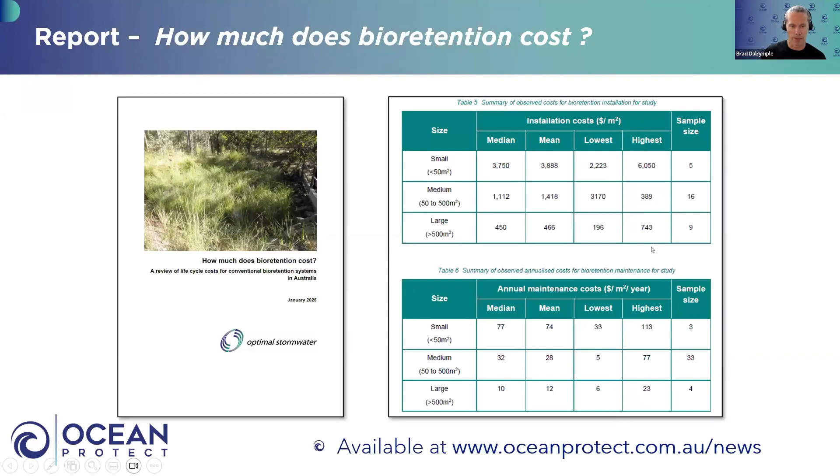Speaking of talking, who doesn't love a good podcast? And Sean has even made a guest appearance. Ratings went through the roof, I'm sure it wasn't just him listening to himself. But we've got a couple of crackers in recent times. Our very own Justine Barrett from CSIRO talking about one of the chapters of her PhD, basically talking about GPTs. And if you love stormwater, gee whiz, you're going to love that one. We had obviously Cal Glanznig before Justine a few weeks prior, a 25-year-old Sutherland Shire Council councillor and filmmaker. So absolute cracker of a podcast, and we'll be releasing a podcast for this year in probably a couple of months' time.

But here we go, okay now I can. Okay, if you want to press start, hit share again, that should be okay now. Actually, I can now see your slides. Maybe I was blocking you somehow. That look all right now? Looks good to me. If there's any dramas in the chat, just let us know. Thanks, Brad, thank you, Sean. The $100 check for that intro is on the way too. Welcome everyone.

We'll get stuck into it. So welcome to 2026. I'm pretty pumped for the year, I think it's going to be a pretty exciting year, hopefully full of growth and professional development and learning something new. So today, hopefully I'll help you on that journey.

So we're going to look at road flow design from a stormwater perspective. This is something everyone basically has to do if they're doing any sort of pit and pipe design or any sort of road design - even just geometric road design, they should be able to do this as well. So if this does sound new, or something your team hasn't really focused on, hopefully you'll be able to go back to the team and spread the knowledge and get people talking about this and discussing it.

So we're going to talk about road flow design. I'll run through a little bit of theory, a little bit of practical knowledge, and then at the end I've got a worked example where we use a very common equation to work out how much stormwater will actually be able to flow down a road. Super useful equation. Once you've got that, take this today and tomorrow you could probably create your own spreadsheets and automate those processes and make your design life hopefully a little bit easier. So we'll get stuck into it.

First, we're just going to touch on road flow and urban drainage systems - basically what we're talking about. We'll put it in some real tangible ways so we understand what we're looking at and can visualize it.

So when we're looking at road flow, today's talk is focused on urban drainage systems because we've got curb and channel and a road type formation. So that's what we're going to focus on. But the reason why road flow - or how much water can actually run down a road - is so important is because the roads actually act as part of the stormwater drainage system.

Now, I look at roads and that's the first thing that I see, because I'm a bit of a stormwater nerd myself - I'll just see a big open channel. I don't actually see a road for traffic and cars and everything else, that's sort of secondary to me. The first thing I think about is flooding and how much water it can actually convey, and where along those roads there's a problem where the water just sits, where it's in a sag. So hopefully after this, you might look at roads a little bit differently as well.

The Australian Rainfall and Runoff, our national guideline for stormwater, recognises that roads basically act as overland flow paths. That's a bit of a mindset shift you've got to take when you get into stormwater engineering and design. These road flows are an intentional component of the major stormwater drainage system, not just pits and pipes and headwalls going out into a creek. The actual road itself forms a very big part of that.

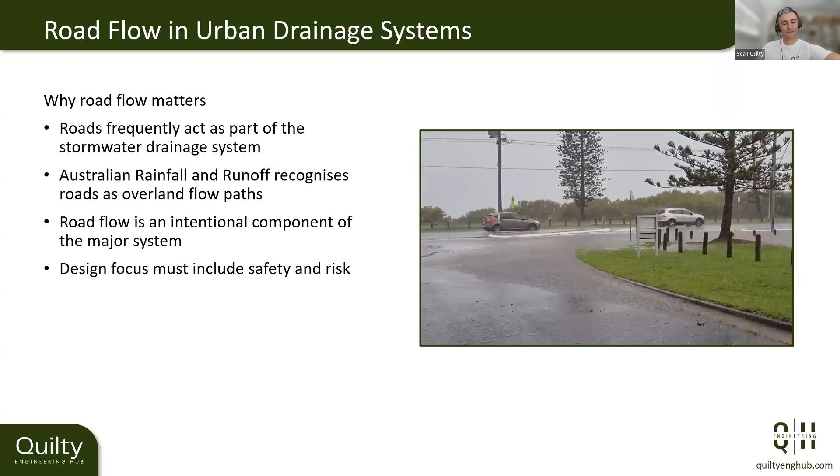When we're looking at road design, it's important to remember that exceedance is expected. When I say exceedance, that means the flows going through our road exceed the minor system capacity - we'll talk about major and minor systems shortly. Just remember, our roads and more importantly our pits and pipes are designed to exceed. They're designed to be overwhelmed or overcapacity, and to surcharge and spill out. That's how a good civil designer or civil engineer will actually design their systems.

AR&R states that exceedance is expected and unavoidable. When it comes to stormwater frequency - how often you get these storms, how rare or intense they might be - we're never able to construct or engineer a pipe or road to convey the stormwater all of the time. There's always going to be some events that exceed our design expectations, and that's how we try to build that into our design as well.

So if exceedance is expected and we can't avoid it, we know the roads are going to flood, our design focus then shifts from prevention to consequence management. This is something I've believed for many years now. When it comes to stormwater, maybe 30, 40 years ago it was all about looking up design tables and charts, and you could pinpoint exactly what the storm's going to do. Whereas we know it's much more unpredictable, especially when we start looking at the climate change impacts we're already feeling and going into the future.

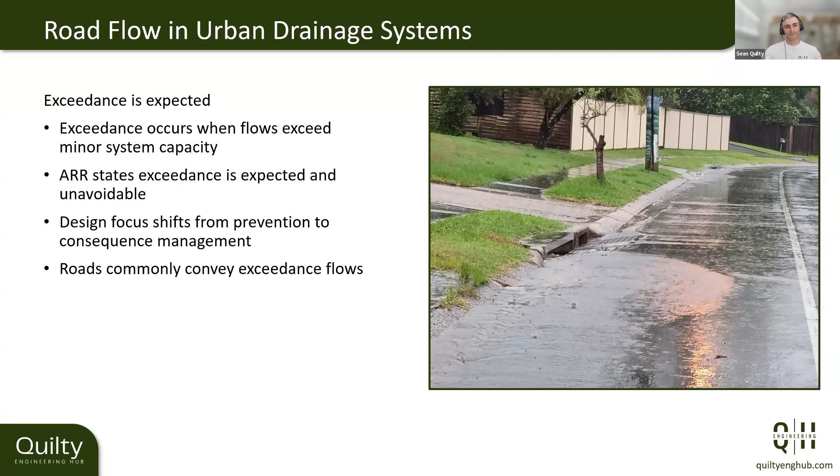So when we start looking at roads, I think everyone will look at roads a little bit differently now. Any new road that's now designed in the last 50 years or so is designed to be an overland flow path, particularly in urban environments. It's just a great big, wide, very shallow channel, essentially.

AR&R identifies this. They know that overland flow paths are critical infrastructure now when it comes to stormwater. So it's not just the pits and pipes. In fact, I'd go as far to say the pit and pipe drainage is just a very small part of the design, and you shouldn't even really rely on that, to be honest.

You should be looking at the major systems, these overland flow paths, your road design. I would personally rather spend 80% of my time designing that than the other way around, focusing on pit and pipe design for most of your design.

Unfortunately in the industry, the people I work with, me as well coming through, I used to focus a lot of time on pit and pipe design, whether it was 12D or now Civil 3D or Civil Site Design. I'd spend hours and hours getting your pits and pipes just perfectly functioning, and then I'd have a very small amount of time where I'd go, oh yeah, I better check that road flow. It should be the inverse. You really should look at the road geometry, where your overland flow paths are going, and be comfortable with that, and then jump into the pit and pipe design.

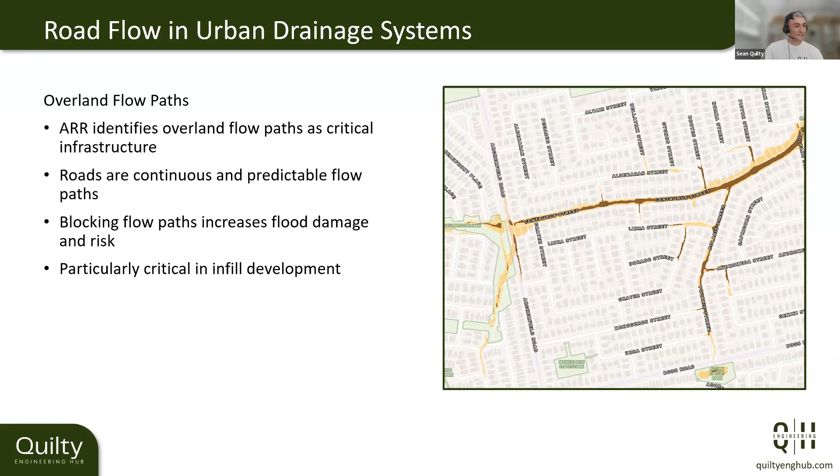That's what we're talking about when we say road flow. It's all about the water running down our roads. So when it comes to design, we know that we need to think about safety and what sort of hazards we might encounter.

So the most common approach to stormwater design for urban areas is where we look at minor and major drainage systems. We split these up because as engineers, we're a little bit lazy, to be honest - we want to spend the minimal amount of time designing these things. If we try to design for every single storm, you'll be there for months on end, overwhelmed with the numbers you've got to filter through. So we try to simplify this by splitting it into a minor system and a major system.

The minor systems are for very frequent storms, so not too intense - something you'd expect to see every year or every few years. Major storms are, let's call it, a once-in-a-lifetime type of storm, pretty rare, but it does a huge amount of damage because of the intensity of the rain falling. The minor systems consist of underground pipes.

Pit and pipe design is basically what we put in the ground for these minor systems, for the very frequent storms that are occurring. That top image kind of shows you what it looks like. So shallow flows, the roads are pretty much dry in the sense that water's not running right over the road, and you control a lot of those flows with your pit and pipe.

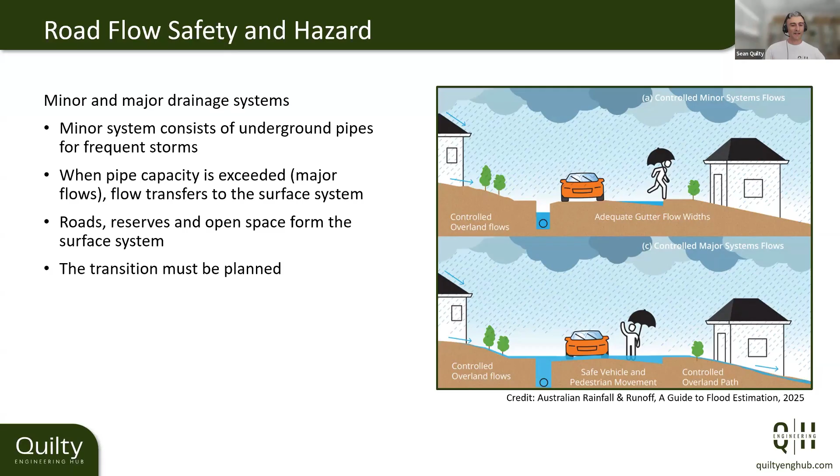Water will come up to the surface, it'll surcharge, and then you're trying to manage that surface flow. So you still want to make sure that that's safe. The other thing we've got to think about is how you transition from the pit and pipe system to how it actually surcharges, because even that transition is an important design factor you've got to incorporate. You don't want one single gully pit or manhole blowing its top and becoming a safety risk. You want it to come to the surface in a controlled manner.

And then when you think you've got it all sorted, which is kind of how I learned as well, I thought, oh yeah, I kind of understand this. I've got pit and pipe design, I've got the road flow, we're all good, here's the design. And then someone tells you that you've got to think about blockage factors and failure scenarios, and all of a sudden you've got to redo a lot of that work and look at a lot of what-if sort of scenarios.

So blockage factors are super important, because when you have a storm, especially the really major storms, you're almost guaranteed to have blockage somewhere in the system. Because when that sort of storm comes, it's a massive east coast low pressure system, it could be a cyclone. We know even here in Brisbane we get hit with cyclones now. So when that sort of storm comes, there's a lot of debris, fallen trees, all sorts of stuff that will block up our pit and pipe systems.

And even the roads themselves become blocked with all sorts of debris. So you've got to think about that when you come to design, especially for the road flow as well. If something blocks, maybe more water is going to come to the surface than you anticipated.

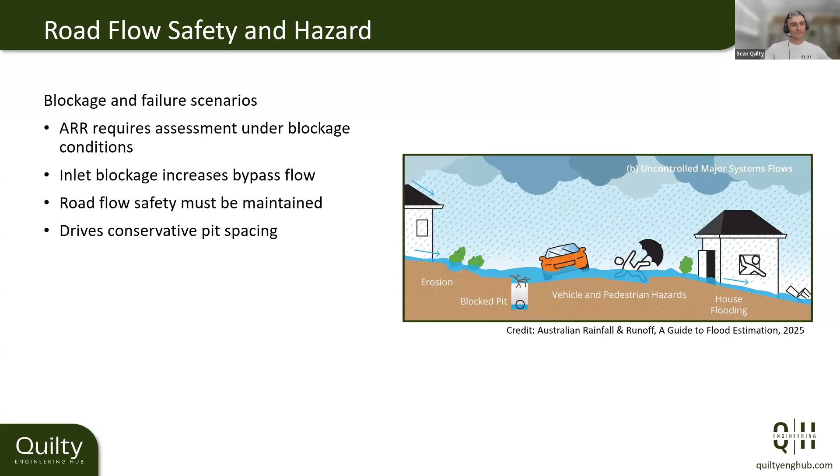And then when it comes to the safety or the hazard that's actually occurring, this is one of the most common metrics that we use, which is the depth velocity metric, or the DV product. What it essentially tells us is when you get the flow running down your road, it will have a certain depth and it will be traveling at a certain velocity. So when you take that depth and velocity and multiply those two values together, you get a certain value, and we use that as a threshold. We say, well, if it's below a certain threshold, we're going to deem that to be safe.

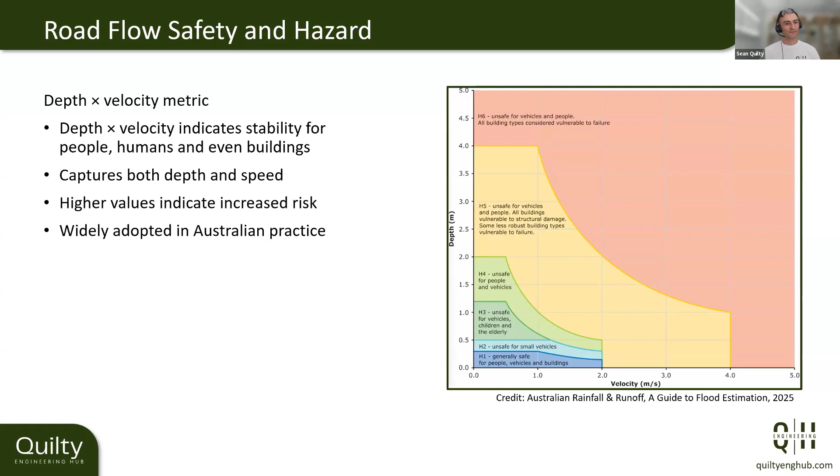All right, so we've got a fair bit of theory in there. As usual, I'm just going to bombard you with the information, and then we'll have Q&A at the end of this as well. Hopefully you'll be able to take this away, over the next few days have a bit of a think about it, put it in practice, and then go back to the YouTube and re-watch it to start unpacking a lot of these things. But we'll put it into practice now, and we'll see how that theory or those fundamentals come into play.

When we're estimating approach flow or road flow, we typically use the rational method. In urban environments, we're talking about very small catchments. Each sub-catchment for a gully pit or an intersection is extremely small, relatively small, so the rational method is more than enough to estimate how much flow will actually be going down. We use that to estimate our road flow.

There are some things to think about. When you look at approach flows for checking your design, make sure you check the upstream bypass. There might be gully pits that don't capture all the water, and it will actually bypass downstream, so you've got to make sure you account for that as well.

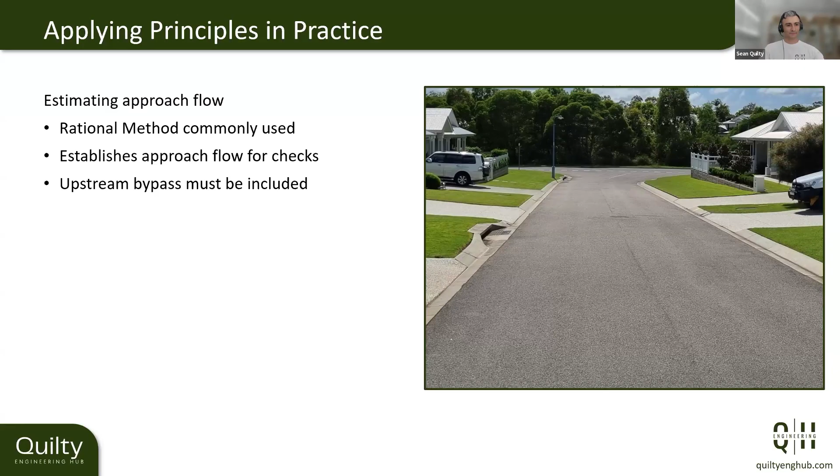This is where the half road capacity concept comes from. I'm going to pull up an equation soon, and we're going to go through a worked example where I'll actually crunch numbers with you. You'll be able to watch this later on and do the calculations by hand yourself as well. But it's based on a half road capacity concept.

When we look at the road itself, we actually split it in half. This is talking about a typical two-way crossfall road. We look at half road on either side, and there's a few reasons for that, which I'll explain.

The road flow safety check that we use is actually a pretty simplified method. There's a few rounding sort of simplifications that we'll use, and you'll see what that looks like. But it makes it very quick and very easy to assess how much stormwater will actually run through a road.

Using this concept, we can estimate the flooded depth, the flooded width, and the velocity of that flow running through that road. We can then compare this against safety limits or thresholds and see if that flow we're looking at is actually deemed safe or unsafe. That allows us to basically say, yep, okay, that road is acceptable, and we'll keep moving on to our next design step.

Each half of the road is analyzed separately, and there's a couple of reasons why we do this. Most of the time, your stormwater pits won't always be perfectly opposite each other on the left or right-hand side of the road, because it's really based on the catchment more so than just geometry or symmetrical design. That's where you'll analyze the half road on each side separately.

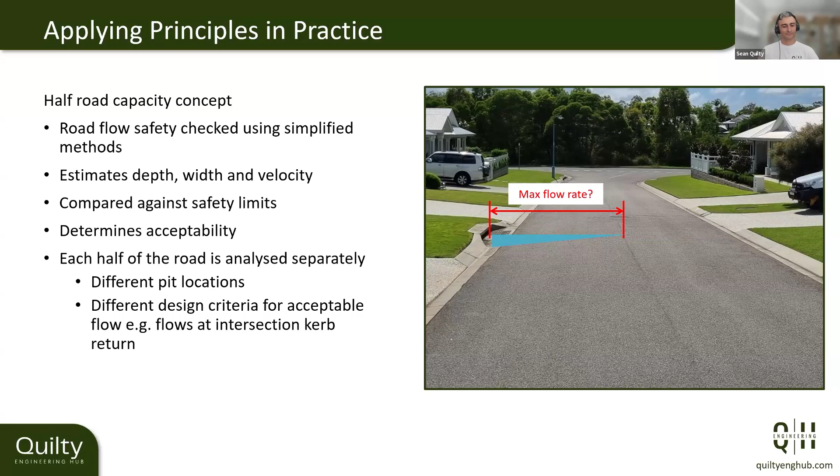This is all about approach flow. Make sure you don't mix it up with inlet capture. When we use Izzard, it's got nothing to do with pits and pipes - this is purely just the flow running down your road. Something I have seen a couple times is some people might confuse that with inlets. It's got nothing to do with that yet. You're just working out how much water is actually approaching a particular point.

Once we get that, and we use Izzard's equation, that's when we can start to look at the inlet sizing, because we know how much water is approaching the inlet, and then we take that Q value and use that in our inlet design.

We're going to do a worked example where we basically use this equation, and I'll show you all the different values and how you calculate it. It's pretty simple - there's a few steps, but it's not hard to do. Hopefully you can follow along, and then after the worked example, we'll jump back for Q&A.

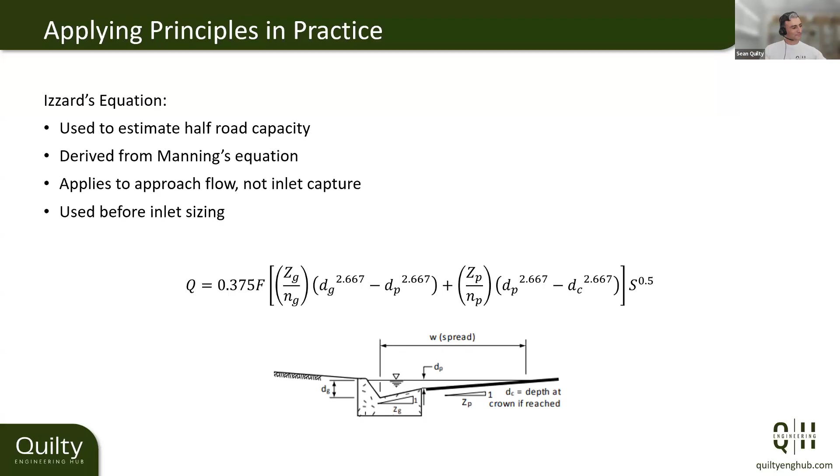All right, so this is pretty typical. This is something, if anyone's done any sort of pit and pipe design, this will be standard practice. You would have done this for pretty much all your gully pits, or at least designed for the worst case, and then just use your best judgment to see where you need to look into it a bit further.

So the first thing you want to do is identify the point of interest - where you're looking at where that flow is actually going down your road. In this case, I've picked a typical urban residential area, and I've picked a gully pit. I want to know how much water is going to flow towards that gully pit - before it hits the gully pit, how much water is actually flowing down that road. So that approach flow, QA, subscript A, that's what we're going to use for our calculations.

Now, Izzard's equation that we saw previously, that is calculating the approach flow, that QA value.

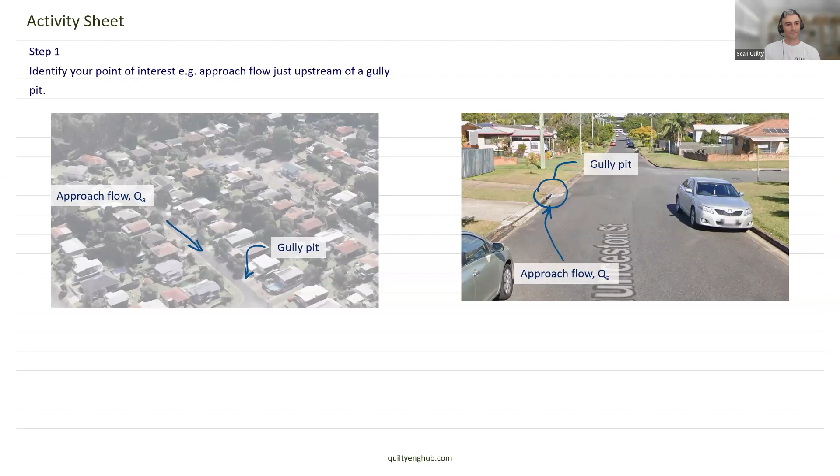So once we know our area of interest, we can then use our catchment delineation and our rational method approach. For those of you that may be long-time listeners, you might recall back from 2024 when we did the webinar series, we did a rational method webinar. So if you need a refresh, jump online, jump on Ocean Protect's website and look up that old webinar. Apologies already, but I think I went way over time for that one - I talked the audience's ears off on that one. So be prepared, there was a lot of content that we covered.

So step 2, we look at the approach flow, the point of interest, and then we work out how much water is basically coming down for that catchment. Now we're going to do a similar thing with Izzard's equation, and we're also going to get a Q value, but we want to compare it to this because this is going to tell us what's actually going to be generated by the catchment.

And you'll see as we go through this, it's a bit of an iterative approach. You work out your catchment flow, you'll work out Izzard's equation, what the Q value is, and then you'll just keep adjusting your flow depth essentially until those values match. But you'll see how that works here. So for this particular gully pit, I've worked out that there's 0.18 cumecs, 0.18 cubic meters a second, that's going to run down towards the gully pit itself. So that's what the catchment is going to generate in a minor storm in this case.

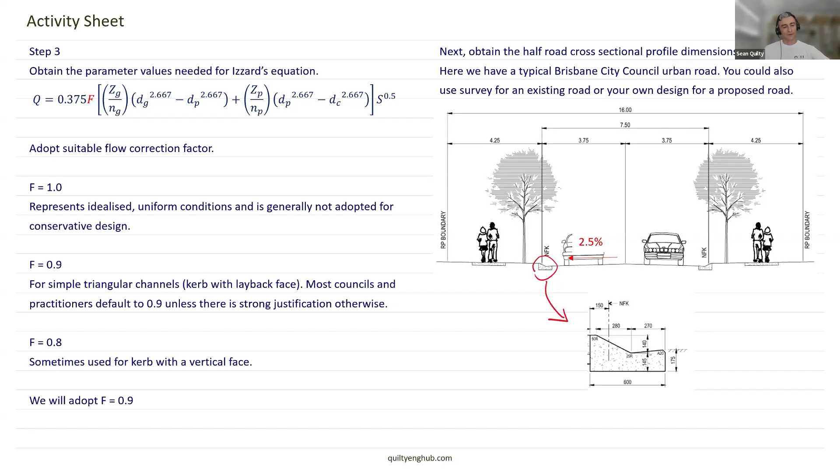Now this is for an existing road, an existing subdivision. You can use this equation to assess how much flow might be coming down at a certain point, maybe before you start discharging into an existing pit. Or you can use this for proposed works. You might have your design in 12D, or maybe another designer has given you the 12D model, and then you need to do a bit of a stormwater check. This is where you'll be able to very quickly crunch some numbers, pen and paper, and see what sort of road flows you're looking at.

So looking at a few more parameters we've got here as well: our Z values and N values, and the subscript G is for your gutter. The ZG value is basically just telling you what that slope is for the kerb tray, so we calculate that. I won't go through every single intricate detail in these equations - I'll let you come back to it, because I'm conscious of time. But essentially we just find out what that batter slope is for the kerb, so we've got a ZG value, calculated that.

Our Manning's roughness - typically you're going to have concrete and asphalt for your urban road, so we just use 0.013 or sometimes 0.012 for concrete. Once we've got that for the gutter, the ZG and the NG, we do the same thing for the pavement - we work out what our slope or batter, our crossfall for the road is. And then we also look at the N value, the roughness value, for our road as well.

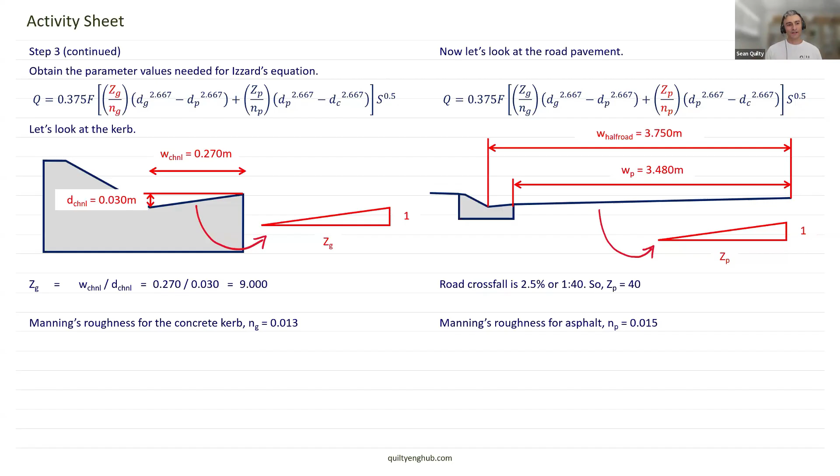So once you've got that, you've got most of these parameters we're ticking through. We've also got this S parameter - this represents the longitudinal grade of your road, so you'll take that value as well. Again, if it's an existing road, you could use survey, or even if you're really stuck, you could use LiDAR just to estimate what sort of road grade you have. If it's a design, you can obtain it from your model, your Civil 3D or your 12D model, or a designer might be giving you a design to actually check or start incorporating stormwater - you'll be able to get that from road long sections as well.

So then we know what the road geometry is doing, the cross-sectional profile is doing, and also the grade. You can imagine if we start to visualize this as an open channel, we're picturing this in 3D, and then when all this water runs down, you can see how these parameters will obviously have an effect on how much stormwater can actually get through.

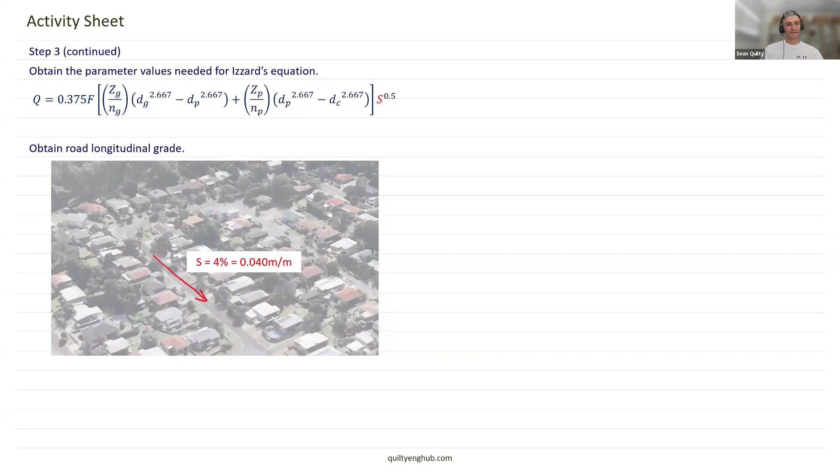All right, so now we just look at these little D values - we've got DG, DP, and DC. We're looking at when it floods, when the flow is running down your road, what is the flooded depth at the gutter or kerb invert point? What's the flooded depth at your pavement edge? And what's the flooded depth at the crown of the road? So assuming a two-way crossfall, we need to measure those values.

Now, we calculated how much flow would actually be generated towards this point, and using the rational method, we worked out it was 0.18 cubic meters a second. The problem here is we know how much water is coming down, we know all our road geometry, but we don't know how deep that flooded depth is.

So what you have to do here is guess a flow depth, run through the calculations and work out what that Q value is. We're going to assume, say, 100 millimeters of flooded depth, and calculate a Q value using Izzard's equation. Then we're going to compare it to the actual Q value, the actual flow rate that's going to come down your road. Almost always, you're going to guess a number and it's not going to be exactly the same.

So when you guess that number, if the Izzard's value is a bit high, then our flooded depth at 100 mil was maybe too much. So we might reduce that a little bit, crunch the numbers again, until your Izzard's equation Q value is pretty much the same as your rational method Q value. That's telling you the flooded depth you calculate will equate to your actual approach flow for your catchment.

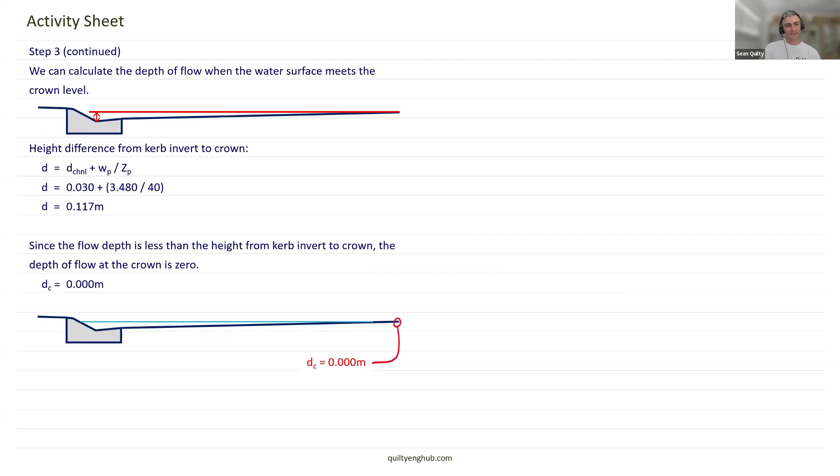Now, once you've got all those values, we can come back to the Izzard's equation, substitute all these parameters you see here on the left, and then, using Izzard's equation and 100 mil flow depth for this particular road, we get 0.211 cubic meters a second. So when the flood comes down the road and it's flowing at 100 mil depth, it's actually flowing at 0.211 cubic meters a second.

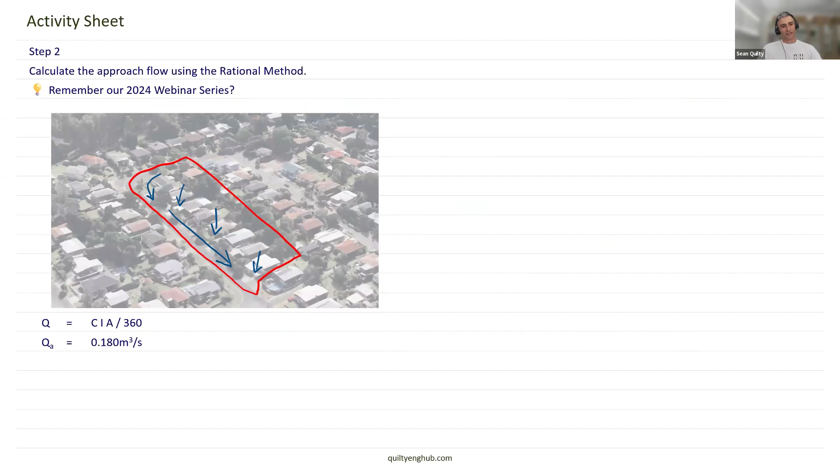So we know that the actual catchment - I'll jump back a little bit - was 0.18 cubic meters a second. At 100 mil depth, that gives you 0.21, which is too much. So we need to reduce that flow depth until Izzard's equation calculates Q at 0.18 cubic meters a second. You'd go through that calculation again, but instead of 100 mil flow depth, use something a little less.

So luckily I've prepared one for you already. If you assumed 95 mil, 0.095 meters depth, that Q value using Izzard's equation gives you 0.18 cubic meters a second. That's telling us this catchment producing 0.18 cubic meters a second will mean you're going to have water flowing down your road at this particular point at 95 millimeters of depth - that's Izzard's equation pretty much working at that Q value.

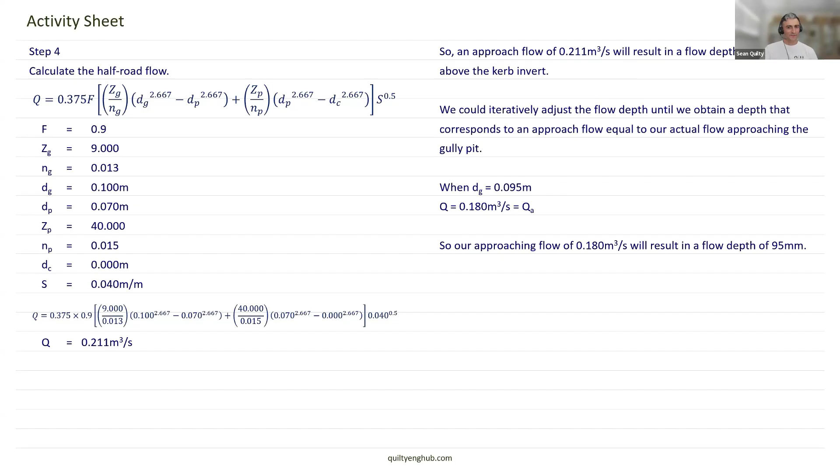But we're not finished yet - there's one last thing we do. We need to check this for safety. It's one thing to know how much water is going to flow down your road, but the other thing you need to ask is whether this is acceptable. That's where the depth velocity product I mentioned earlier comes into play. So when you work out this DV value, you compare it against some maximum thresholds - if it's below it, then you can say that flow is safe.

I won't crunch through all these numbers, but essentially using your cross-sectional profile, and now that you know how deep the flow actually is, you'll be able to calculate your area. If we know our area and our flow rate, we can use our continuity equation: V equals Q over A, or typically Q equals V times A. So we rearrange that to work out our velocity. Now we know our flow depth is 95 mil, and we've calculated our velocity.

So we multiply those two values, and we get a DV value of 0.161 square meters a second.

Now, there's lots of different guidelines out there, obviously depending on councils, states, type of infrastructure, but some typical values you might see: if there's no risk to life, you can get a DV value of up to 0.6 square meters a second.

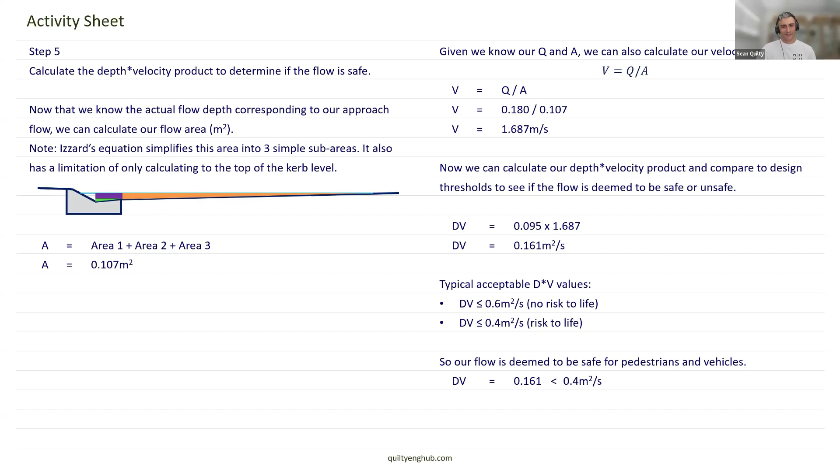Of course, I try to make it easier for everyone. Hand calcs are great, but spreadsheets are even better. So there is a road flow design spreadsheet for you if you like. You can get your copy. This is included with the online course that we've got.

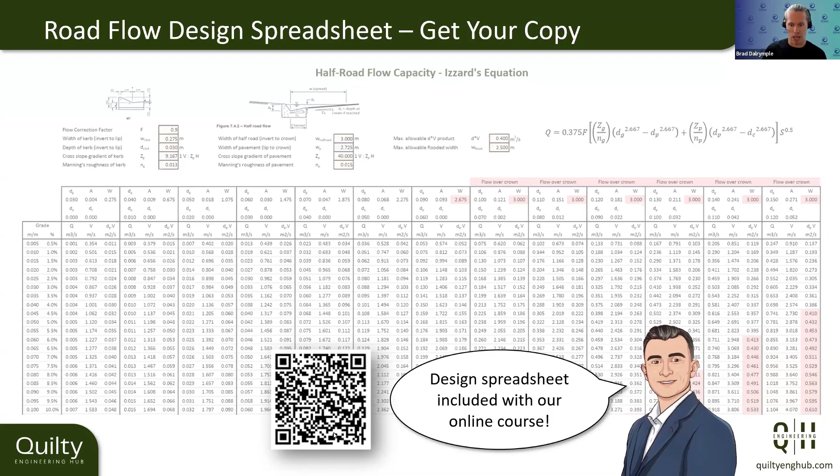A couple of comments around pit inlet capacities. One person mentions pit inlet capacities, and another anonymous attendee asks what would be the best procedure for changing your design for a compliant velocity depth product - adding more pits or increasing the lintel size?

Interesting - both will kind of do a similar thing. It's all about capture, how you get the water from the surface into the pipe system underground. When we do pit and pipe design, we run through hydraulic capture charts for particular inlets - that's your first step. You could quickly compare, say a 2.4 metre lintel, a small lintel, and see how much approach flow and inflow will be captured if it's on grade. Then compare that with a medium-sized lintel and a large-sized lintel, and see how much extra water will actually be captured.

You could compare having a small lintel here and then putting another small lintel 40-50 metres up the road, cutting off the approach flow. You can calculate that the flooded width might only reach 2 metres upstream and 2 metres downstream. If you have one pit with a large lintel instead, the flooded width might go right up to 3 metres before finally getting captured. So it's a bit of a balance, but yeah, really good question.

It's something we cover in our pit pipe workshops as well - we crunch those numbers and let the team go away and do their own design, deciding where to locate different inlets. So yeah, very good question.